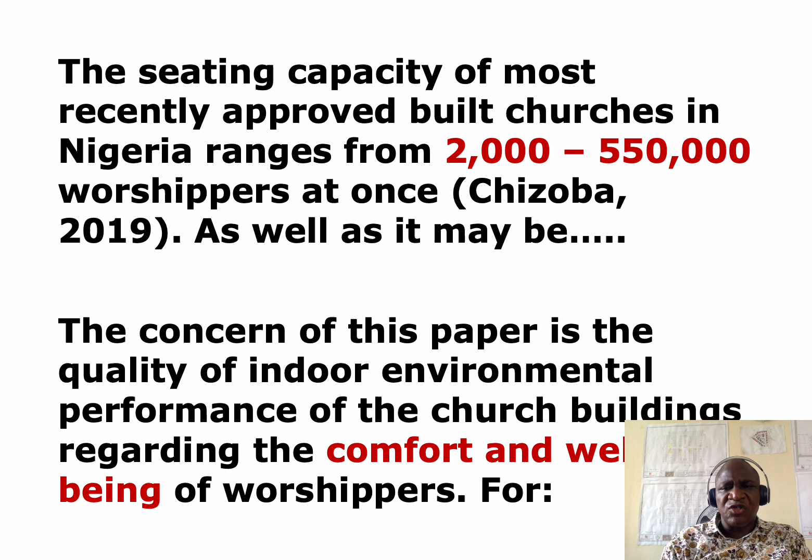Regarding the comfort and well-being of worshippers, in a high-performing church indoor environment, health is preserved, comfort is achieved, and worship flows. On the other hand, discomfort and adverse health impacts, such as sick building syndrome, building-related illness, environmental sensitivity, low productivity, and absenteeism occur.

The US EPA reports that indoor air pollutants cause 32,000 cancer cases annually in the USA, 50% of all diseases, and 90% of colds and flus, especially in packed gatherings. This paper considers church as a packed gathering.

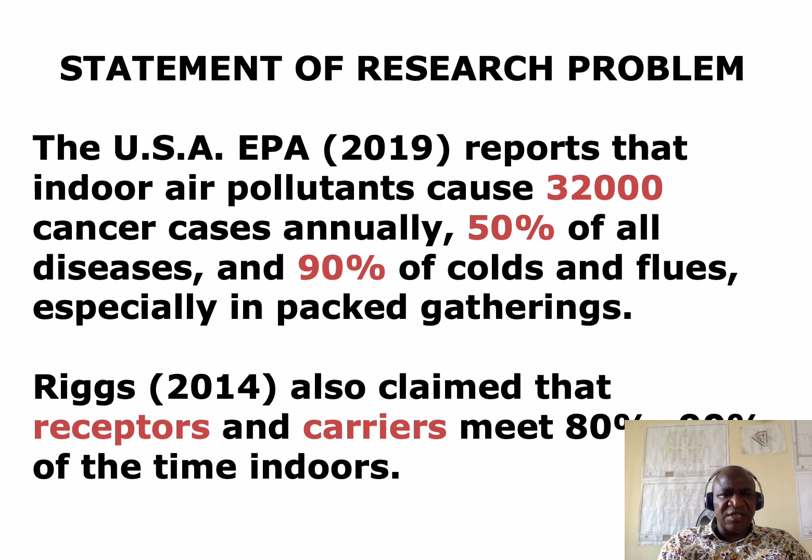Riggs also claim that receptors and carriers meet 80% to 90% of the time indoor. To verify the existence of these indices in churches, Monica and Flori Emilian discovered them in some Poland churches and Katatuo Monastery.

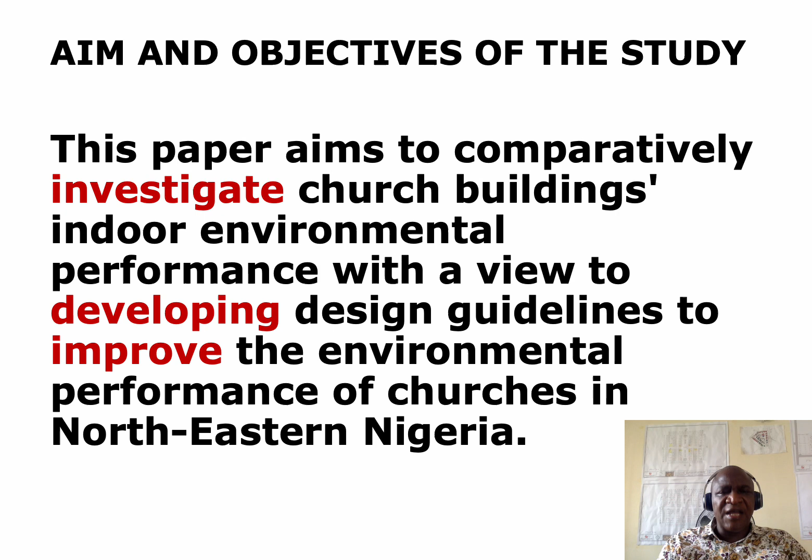According to Lilitaria, these indoor parameters are also inadequate in Nigerian churches and are concerns of this paper. This paper aims to comparatively investigate church buildings' indoor environmental performance with a view to developing design guidelines to improve the environmental performance of churches in North-East Nigeria.

The objectives are to determine the indoor environmental indices that affect the performance of church buildings in North-East Nigeria, and to ascertain the user's perception of the indoor environmental performance of church buildings in North-East Nigeria.

The research question this paper hopes to answer is: how do the indoor environmental conditions of different church buildings in North-East Nigeria compare?

This paper has examined some recently written articles on Nigeria church architecture and discovered that they do not pay much attention to the indoor environmental performance of churches. This has created gaps.

The gaps are: lack of awareness of the current performance of churches' indoor environmental indices in Nigeria; no well-established modeling framework captures the current performance of churches' indoor indices in Nigeria; and an examination into the indoor environmental performance of Nigeria churches is just starting.

In light of these considerations, the focus of this research is on the indoor environmental performance of church buildings in North-East Nigeria for the comfort and well-being of worshippers.

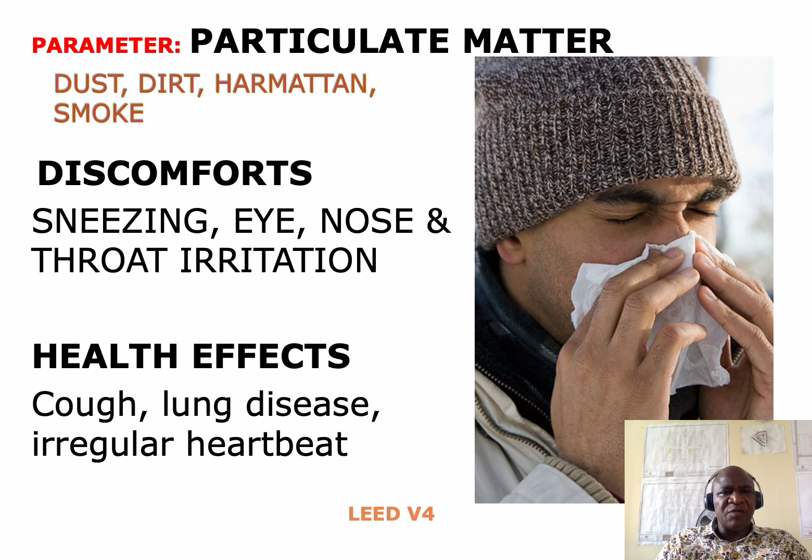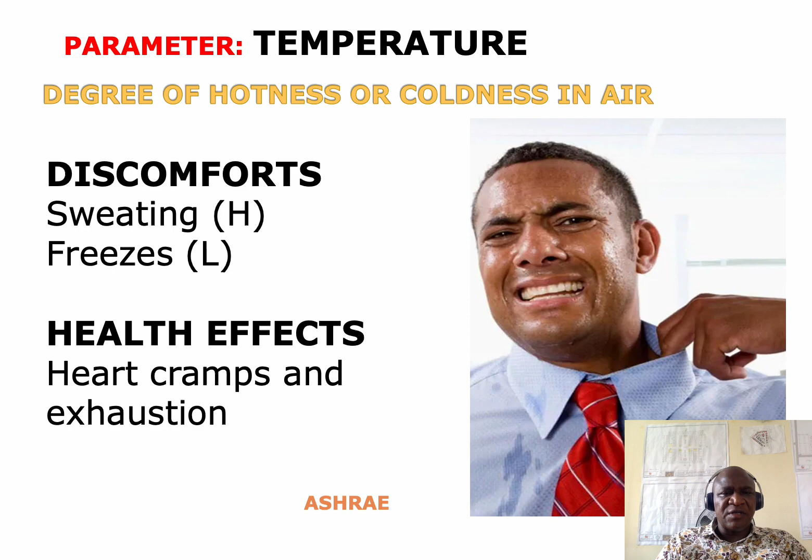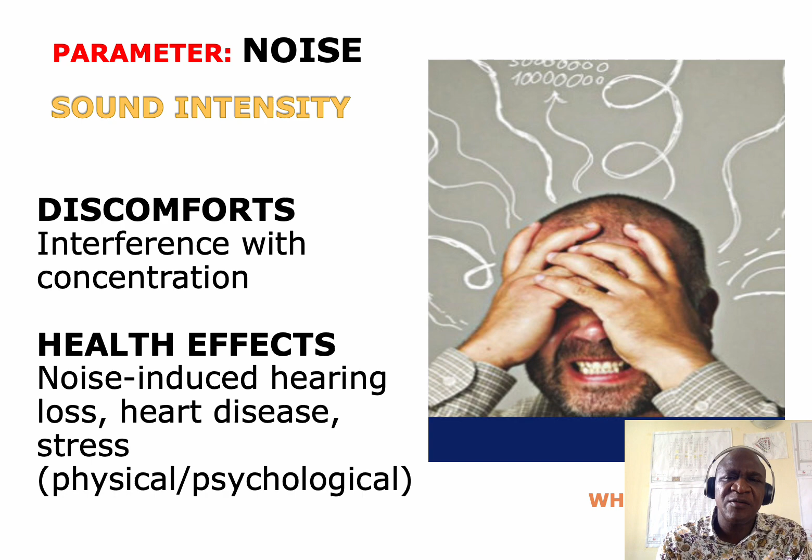Noise is sound intensity. It interferes with concentration during church service, and it causes noise-induced hearing loss, heart disease, and stress, both physical and psychological.

Ventilation. Methodology: the research method is comparative. Philosophical assumption is pragmatic. The research approach is equal status mixed method.

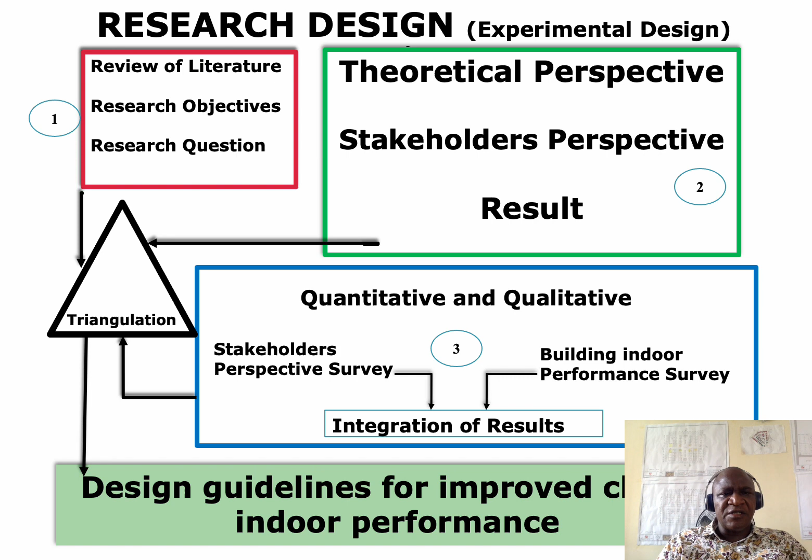The research design is experimental design using triangulation. The population of study is the 5 Christian Association of Nigeria (CAN) blocks. The sampling method is purposive. The sample size is 10 churches from 3 states of North-East Nigeria: Borno, Adamawa, and Taraba.

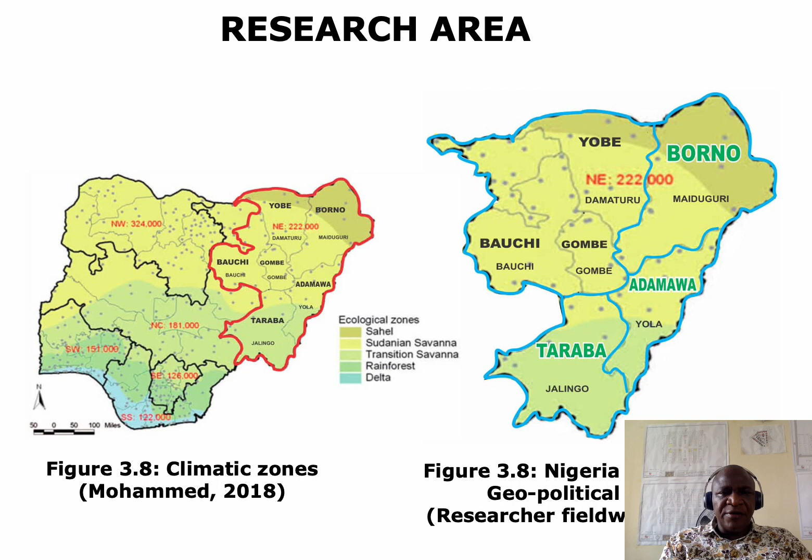Data analysis and discussion of results. Objective 1: to determine the indoor comfort indices that affect the performance of church buildings.

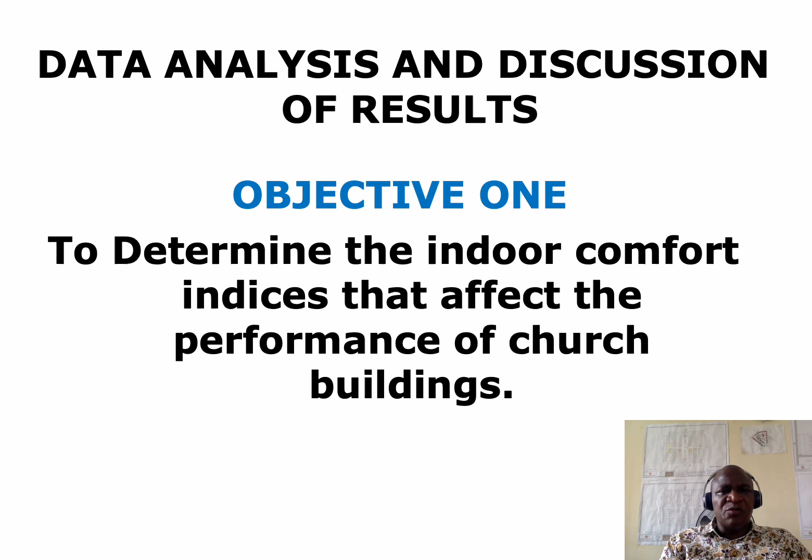In church A1 in Maiduguri, these are the parameters during the dry season. The readings show the result of the rainy season, and LCCN Yola for both dry season and rainy season.

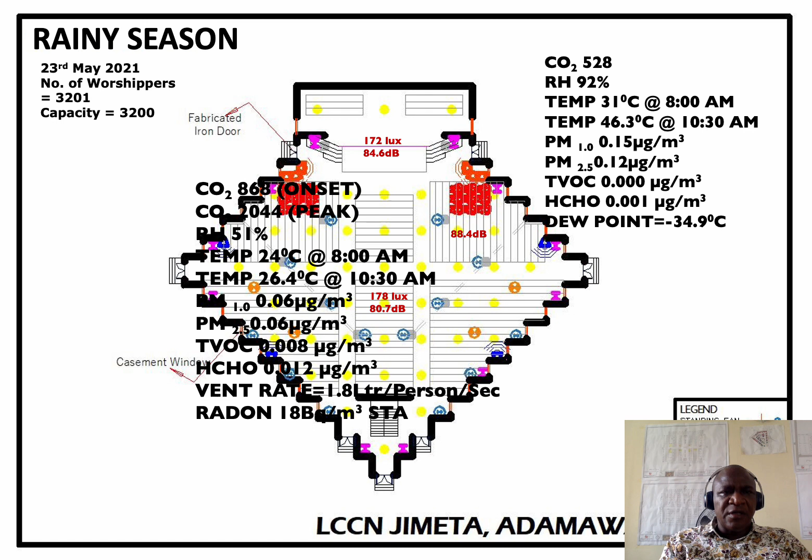The next objective is to ascertain the user's perception of the indoor environmental performance of church buildings in North-East Nigeria. The summary of qualitative results shows that dry air, cold weather, wet weather, and speaker volume are the factors that are most negatively impacting worshippers in North-East Nigeria.

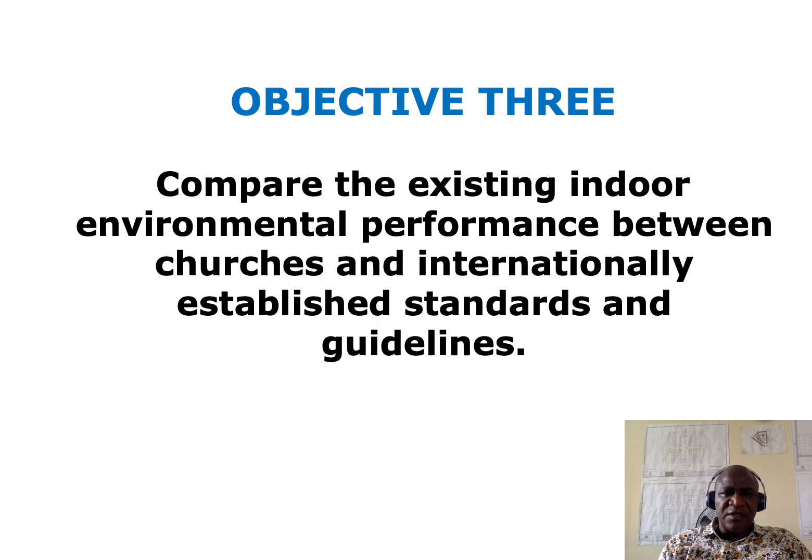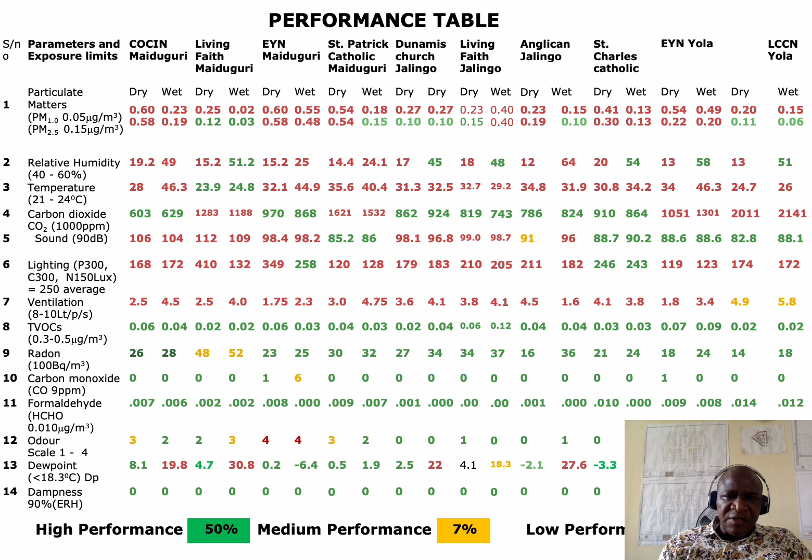Objective 3: compare the existing indoor environmental performance between churches and internationally established standards and guidelines. Yes, it has been compared with the standard. The results are high performance 50%, medium performance 7%, and low performance 43%.

The results were ranked, and the highest negatively impactful factors on worshippers are hot temperature, carbon dioxide, lighting, and ventilation, while the best is the dampness parameter.

There is no church that has dampness issues. You can see the location of the discomfort, the start of the discomfort, the period of discomfort, the season of discomfort, and when discomfort is worse.

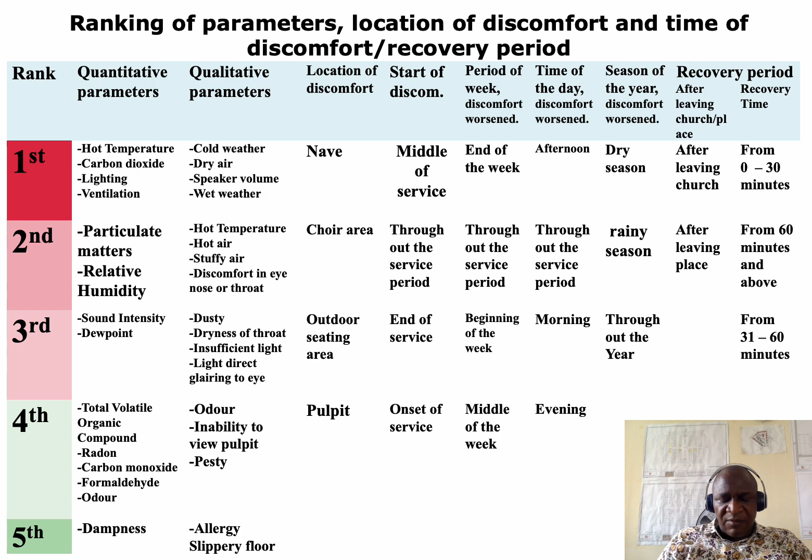What is the period of recovery? The highest is 0 to 30 minutes. The worshippers recover themselves when they are out of the worship place.

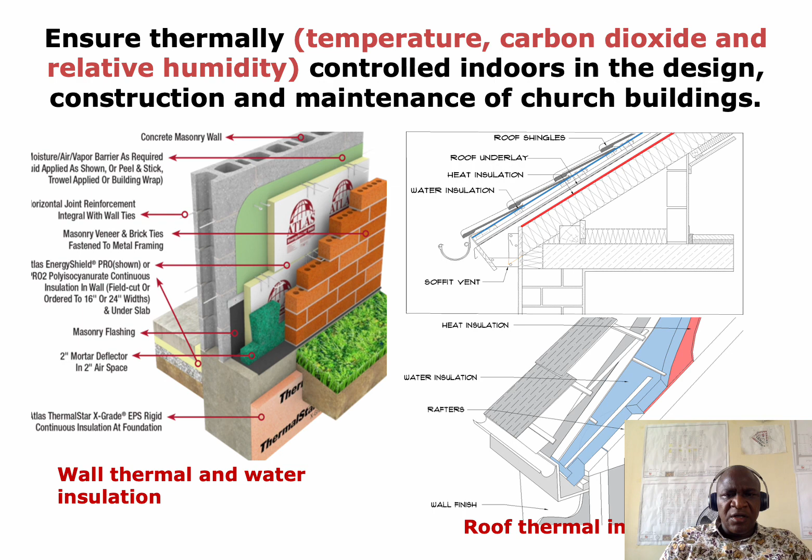Objective 4: develop additional design guidelines for an improved indoor environmental performance. In developing it, we have to take care of temperature, carbon dioxide, and relative humidity by creating wall, thermal, and water insulation, roof thermal insulation, and then running veranda and sheltering arcades.

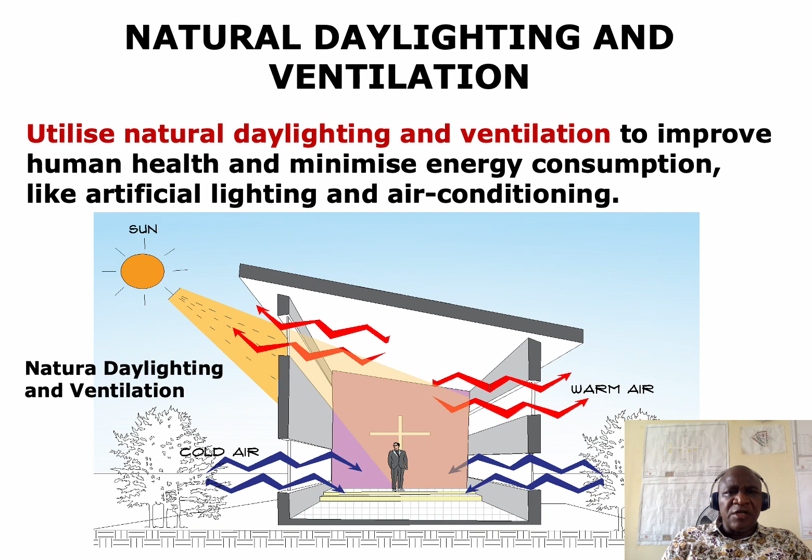Neem trees are the best for that area to reduce the heat, along with Bermuda grass. Also, natural daylighting and ventilation is needed.

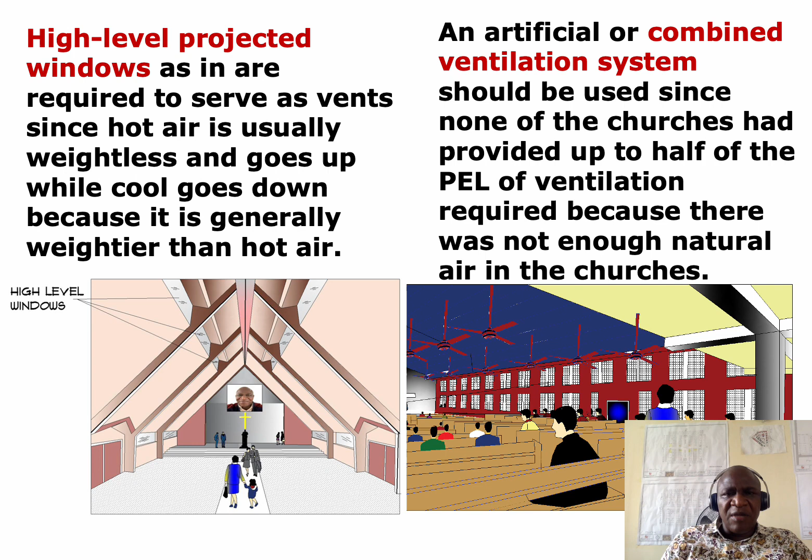Energy efficient window glass should be used, with high level projected windows or combined ventilation systems. Have indoor humidifiers during the dry season when harmattan is high, and ventilation louvers are also recommended.

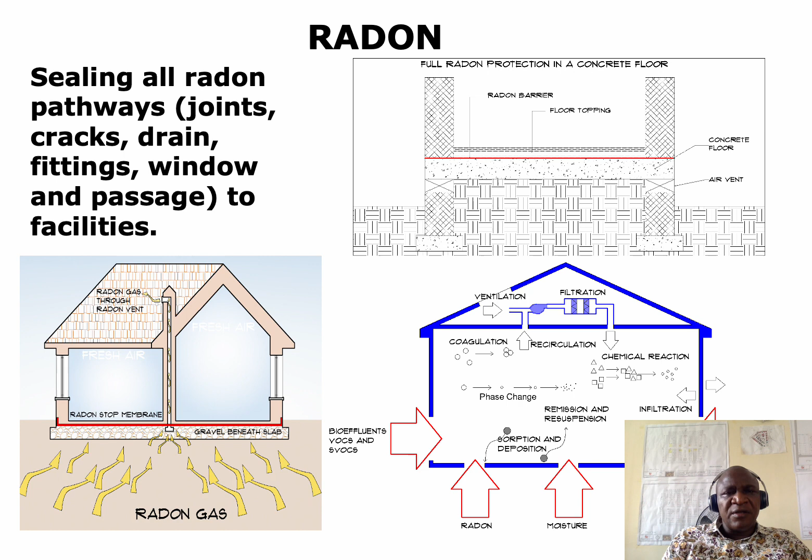All radon pathways need to be sealed. Then, to curb the carbon monoxide, the placement of the power plant generator needs to be done properly. For dampness, a water seal needs to be used on the roof and foundation.

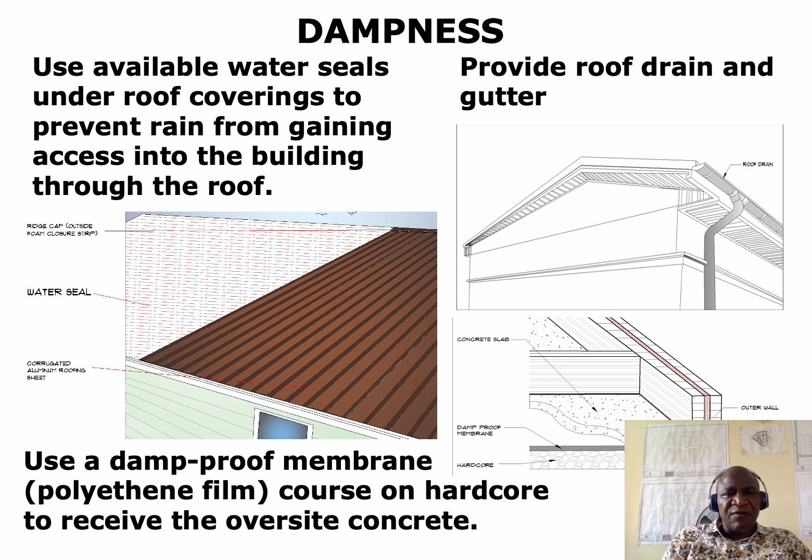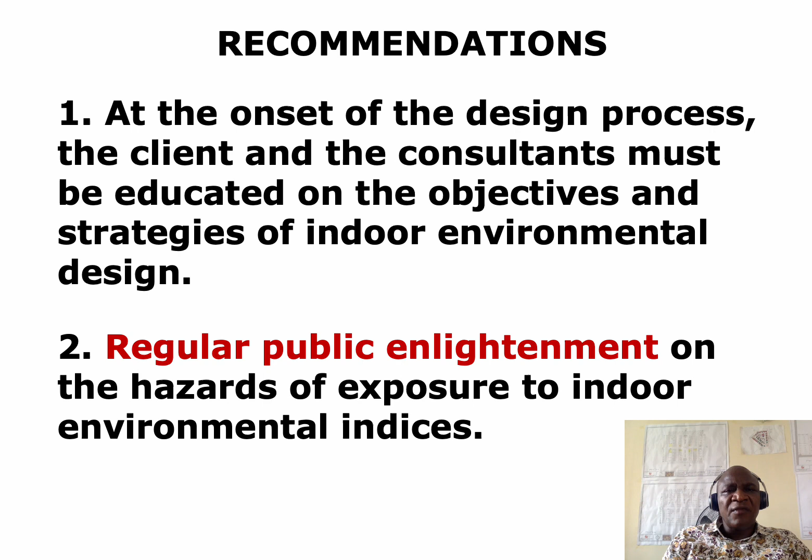These paper findings demonstrate a need for high-performing indoor environmental churches in North-East Nigeria. Recommendations for their implementation are provided.

Contribution to knowledge: this paper has established 6 parameters that are low performing, 1 parameter that is medium performing, while 7 parameters are highly performing.